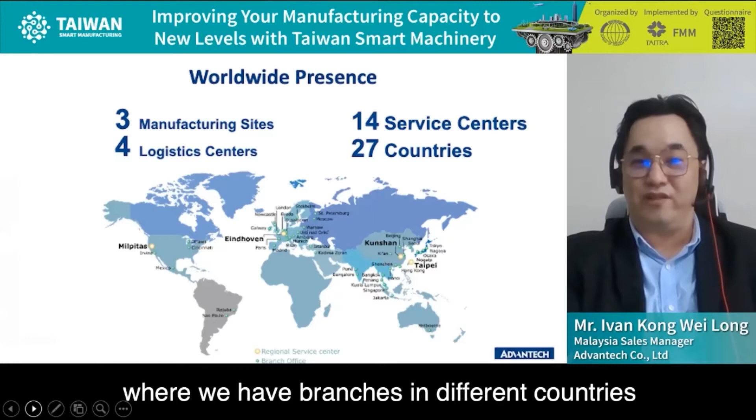This slide shows the establishment of Advantech worldwide, where we have branches in different countries to support our customers. There are 3 manufacturing sites: Kunshan, China, Linkou, Taiwan, and Milpitas in the US.

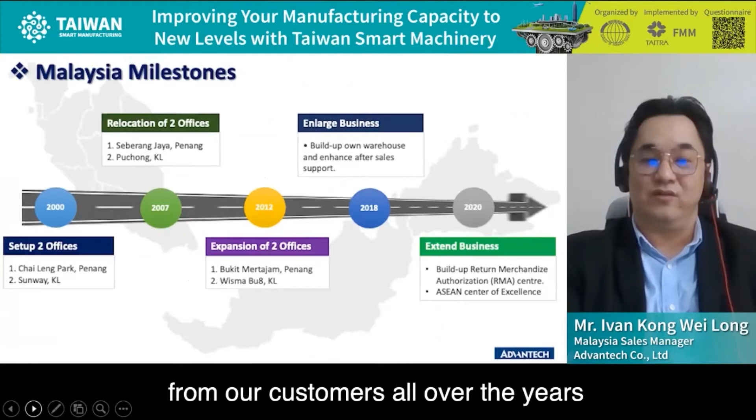For Advantech in Malaysia, this month marked our 21st anniversary of establishment in Malaysia. Thanks to all the support from our customers over the years to Advantech Malaysia. Let me share some recent developments of Advantech Malaysia with all of you.

First is a center of excellence, where Malaysia is a key bridge to ASEAN on new technology developed in Taiwan HQ. This team will be focusing on business development in ASEAN countries and helping with product transfer and also ASEAN ecosystem partner solutions to go wide and far.

Second, we also established a new repair center, or RMA center, in Malaysia to support the whole ASEAN region. This is the location of both our offices in Malaysia, one in Penang, another in Bandar Utama area.

Industry 4.0 is transforming manufacturing worldwide. There are steps crucial to be taken to achieve such a vision. I'll call it steps to success of this vision. It all starts with data acquisition or data collection, then computing and visualization, followed by central management of decision making by respective personnel in the production.

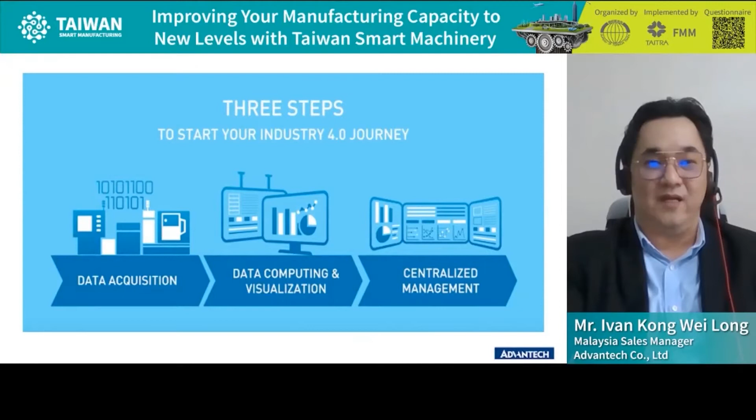When it comes to products and solutions, especially for smart manufacturing, we have produced various products to support this vision. We have lines of products and solutions to assist factories which need assistance as they upgrade existing facilities and establish new ones to take advantage of Industry 4.0 optimization.

From the bottom of the slide, you can see in the diagram where we need to have data collection from the machine and production itself. We have various modules which can support collecting the data from machinery.

The data will then be sent to edge intelligent solution to facilitate the machine connection without replacing existing equipment, allowing collection of equipment status data and production data. On the top layer, if you can see, is what we call WISE-PaaS.

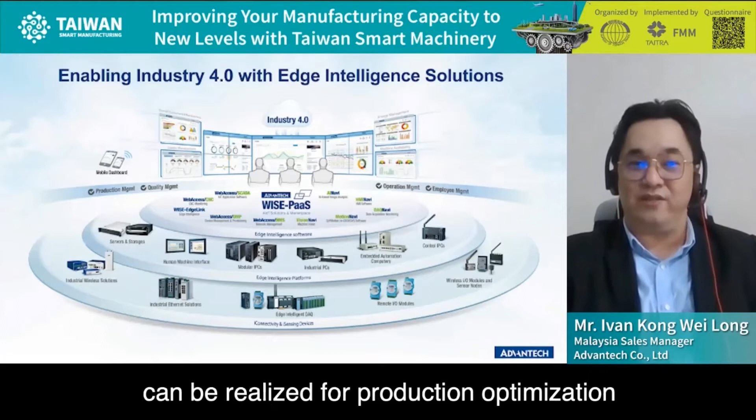It's our software portion, where production monitoring, data integration with MES, and visualization on the situation room dashboard can be realized for production optimization and data-driven decision making.

As last year, we have been promoting and going to market with our OEE solution and optimization solution. Today, I would like to share a new solution from Advantech, focusing on predictive maintenance.

Even though collection of data from the production floor and machinery itself is important, we don't want to miss out on the other crucial thing, the need for facilities and production floor information itself. Let me share today on predictive fault diagnostics, especially for motors and pumps.

What I'm showing is an architecture of data collection from motors, all the way to analysis via AI. Using LoRaWAN technology, which is wireless-based, we will lessen the need to re-layout the infrastructure.

Laying cable is not cheap nowadays, and restructuring a ready infrastructure is tedious. As we are walking into a smarter world, we opt for new technology that can achieve better efficiency and decision making.

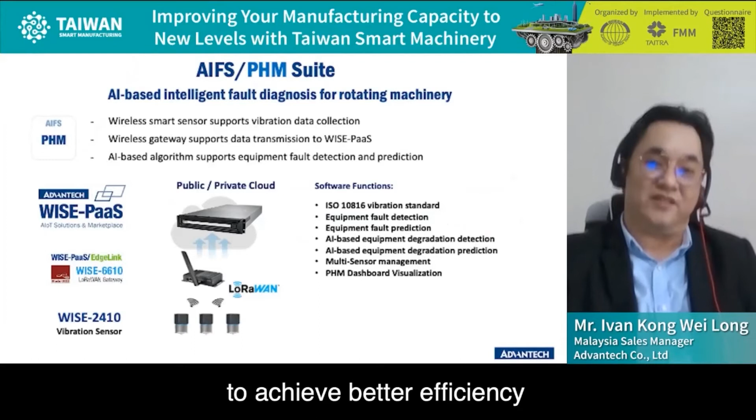In the production floor itself, we comfortably see a transmission distance of 1 km, taking into consideration other building structures and EMI itself. So what do we do after we have the data received?

AI will come into play. Using PHM AI inference, we can diagnose and predict equipment anomalies.

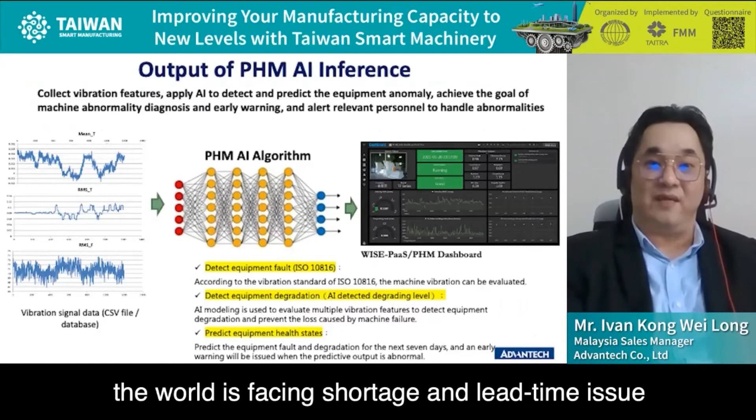As the current world faces shortage and lead time issues, predetermined or forefront early warning is very important. As engineers, we can estimate the degradation rate and also pre-plan ordering using the data from AI. Every decision is based on data, making it more accurate with better communication between teams in the organization.

I call it a data economy. With data, it helps the end customer manage inventory and also know the best time to purchase.

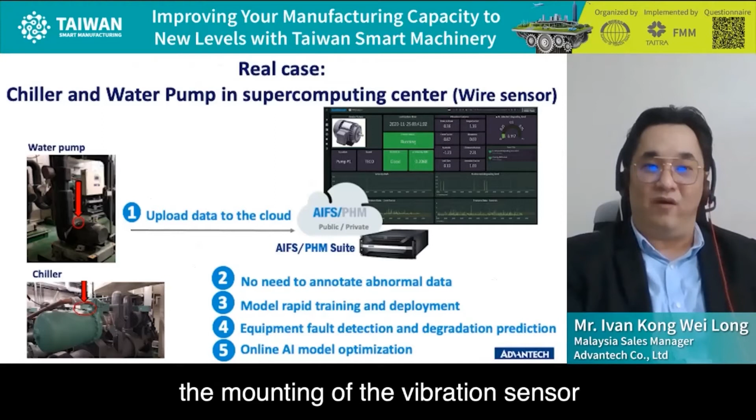Let me touch on one of our successful stories, an implementation in a chiller and water pump for a data center. First, the mounting of the vibration sensor is simple - by a magnet-based metal mounting to attach it to the motor itself. It's wireless and runs on battery.

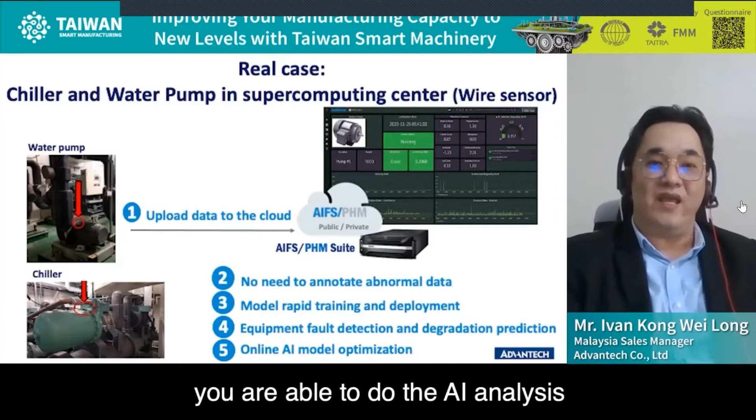We grab the data and send it all to the cloud or an on-premises server. Via the software, you are able to do AI analysis and visualization for the customer to make a better decision. This requires the AIFS PHM suite itself.

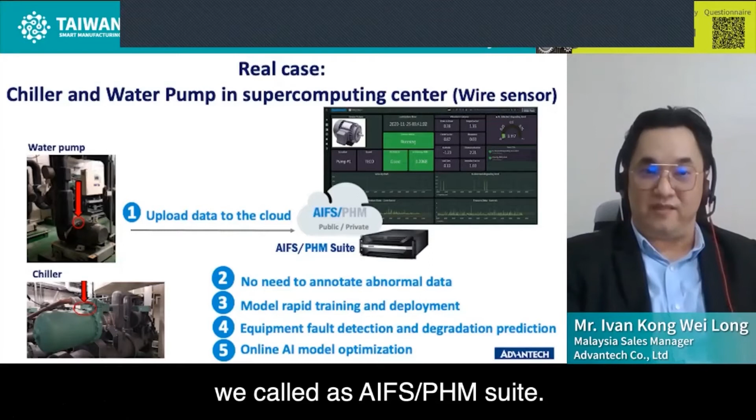Let's have a look at the reporting of the AIFS PHM visualization portion. It provides information on equipment fault via ISO 10816, equipment degrading levels, and prediction of equipment health status. This template is customizable to your preference.

Only what you can't change is the background running of the AI algorithm. The way of reporting, alarm notification, formatting, and add-ons are customizable.

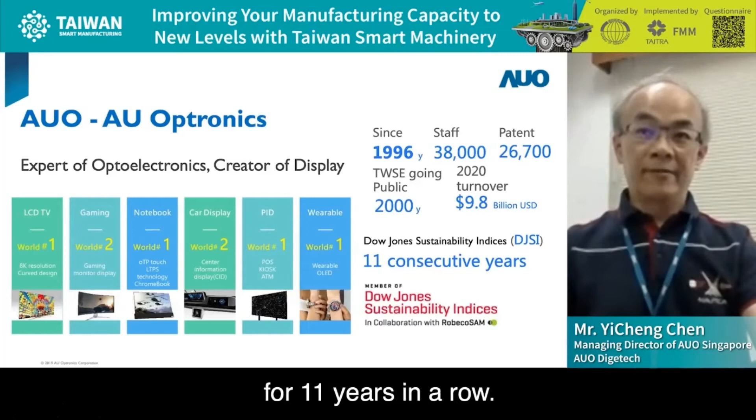Who is AUO? We are not only an expert of optoelectronics with leading technology in the LCD industry, but also an AIoT solution initiator and provider. AUO was established since 1996. Total employees are over 38,000, and we've been tabulated on the Dow Jones Sustainability Index for 11 years in a row.

Every year, we deliver over 240 million panels, sizes ranging from 0.8 to 86 inches, and over 1,000 product models to our worldwide customers. Our major production process includes the front-end and cell process, as well as back-end module fabrication. It is a complicated but delicate manufacturing process.

What's the benefit we get from smart manufacturing? Here is our story, what we can make up from AI and smart manufacturing. So far, we initiated over 100 AI projects every year and cultivated over 300 AI experts with different backgrounds and manufacturing domain knowledge. Total AI trainees are as many as 6,000. As for the achievement of our continuous improvement with AI, our efficiency and productivity is up 30% during the past 4 years. It's a remarkable number, and our related activities are continuously rolling on.

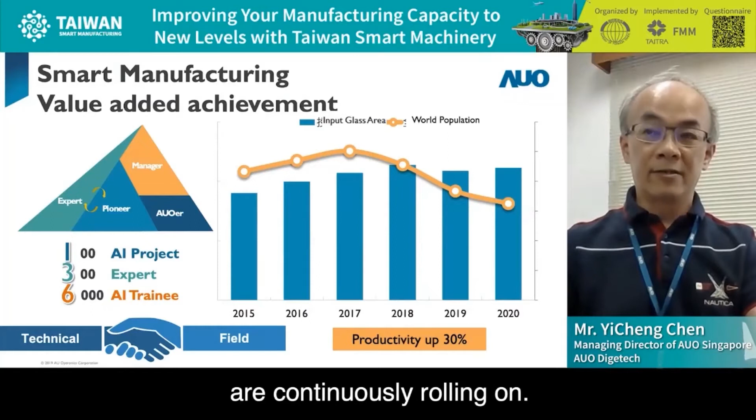AUO Digitech, we are a company wholly subsidized by AUO, leveraging our strengths and experience from our mother company. We are positioning ourselves as a leading AIoT solution provider. Till now, worldwide, we have manufacturing sites and service available: the first, Suzhou and Xiamen in China; the second, in Taiwan; and the third, your close neighbor, Singapore. From Singapore, we can provide different field and domain AIoT service and support you nearby.

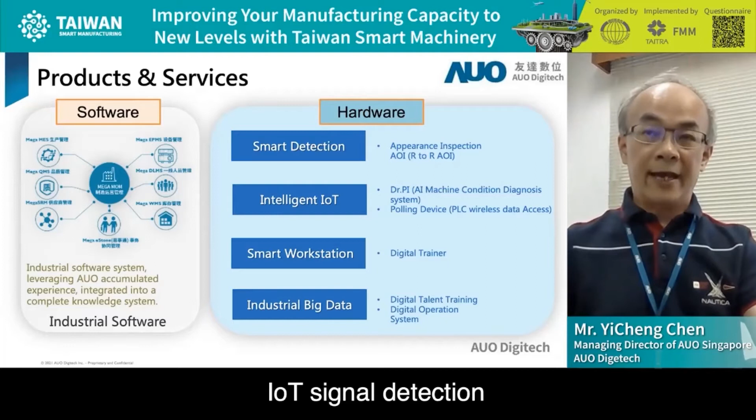With abundant practice and experience accumulated from our mother company, AUO Digitech provides software services like MES, WMS, and EPMS, and hardware AIoT agile and handy products like smart detection, IoT signal detection, digital trainer kits, and industrial data collection and control systems. So far, more than 200 customers from different segments and field applications have awarded AI projects to us, and we play a role of win-win and reliable partnership with each of our valuable customers.

We believe in the future, a flexible but edge ecosystem would be the champion of the new norm of competition. We have devoted ourselves to smart manufacturing and accumulated a lot of valuable experience with our vision of 3C. What is 3C? The first, cooperation; the second, co-creation; and the third, complementary. We believe AUO Digitech would be your best partner for domain-focused solution integration and provision.

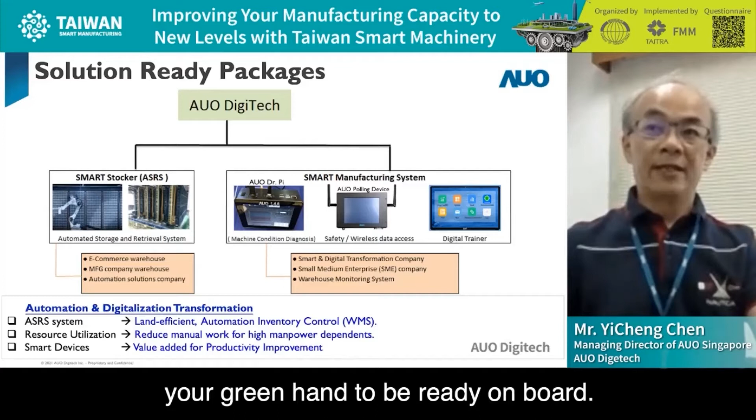ADT Singapore's ready package for your AIoT solution includes ASRS, automated storage and retrieval system, widely used in warehouses for e-commerce, electronics, pharmacy, semiconductor fab, and commodity distribution. As for smart manufacturing jigs, there's Dr. Pi for machine health diagnosis, polling device for safe and wireless machine data retrieving, and digital training jigs to speed up your green hand to being ready on board. With our solution, we can fulfill your need for automation and digitalization transformation. Our ASRS system provides efficient and cost-effective inventory control.

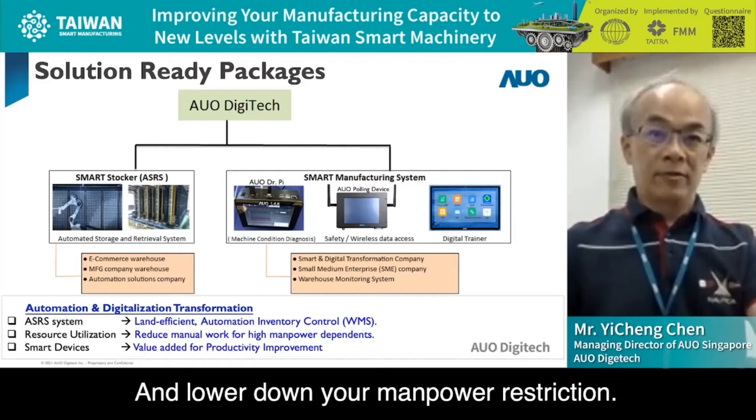And lower down your manpower restriction. Also help you to pursue a value-added production pipeline.

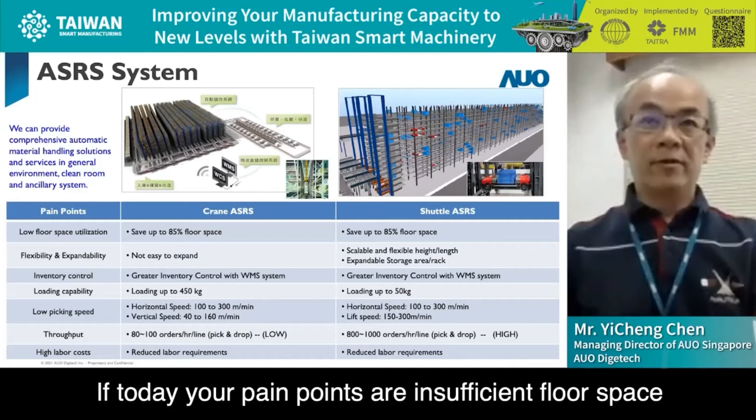What our ASRS can do for you. If today your pain points are insufficient floor space, want more flexibility or expansion capability to have better inventory control, or suffering high labor costs, our ASRS solution can be your best panel for a quick fix.

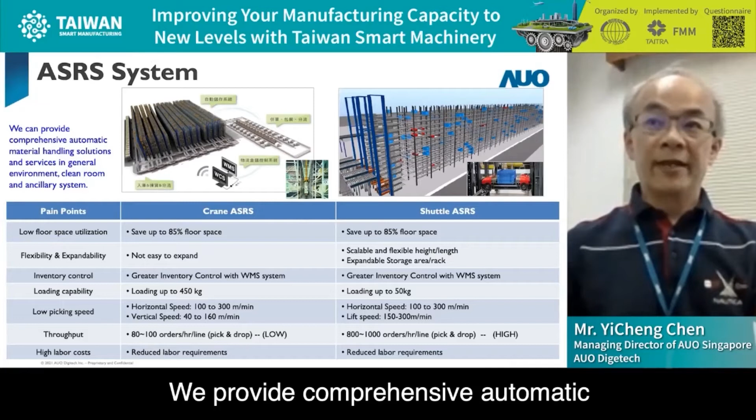We provide comprehensive automated goods handling solution and service in clean room or general shop floor. Both crane and shuttle solutions are available now, depending on your goods loading or throughput limitation.

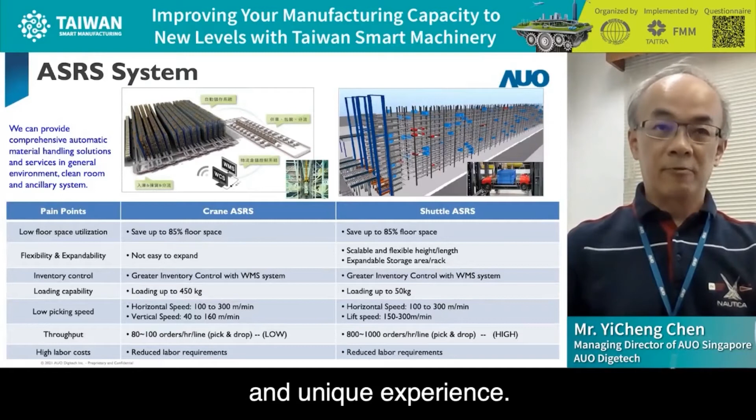As for our smart manufacturing, the first product available to you is our training assistant. It can solve your pain point of high turnover rate of labor force or high training costs.

The installation is a very simple step. Here are 5 steps: first, role setting; second, preparing and uploading your class training material; third, follow our instructions for learning, including training class or quiz; fourth, evaluation of course effectiveness; fifth, vision-based training management.

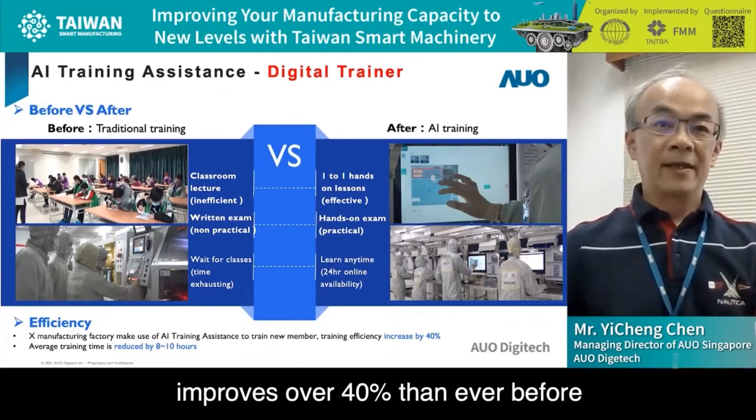Here is our real example we can further share with you. Actually, in our China Xiamen site, with AI training assistance, the training efficiency improved over 40% than ever before, and the average training time shortened by 8 to 10 hours. With these toolkits, we can enhance and repeat our class training regularly and anytime if you need.

The next one, our AI polling device. If your machine is under PLC control, our AI polling device can do something good for you. It can extract and upload your PLC data via Wi-Fi or assign by server or cloud.

Our AI polling device provides plug and play and doesn't need high-cost machine modification. With this powerful signal and data polling jig, you can reduce your machine downtime and improve machine efficiency with productivity easily.

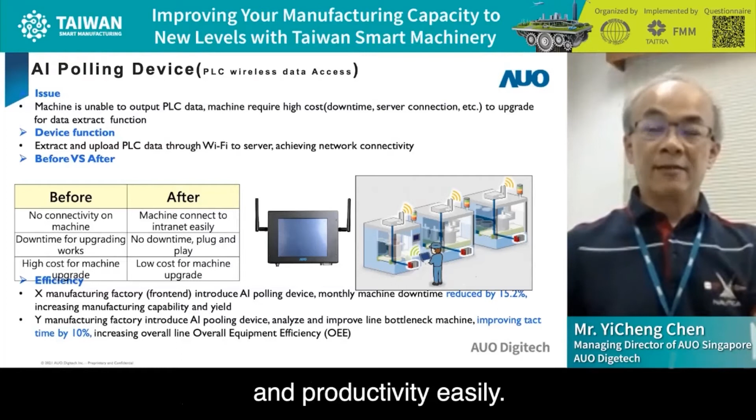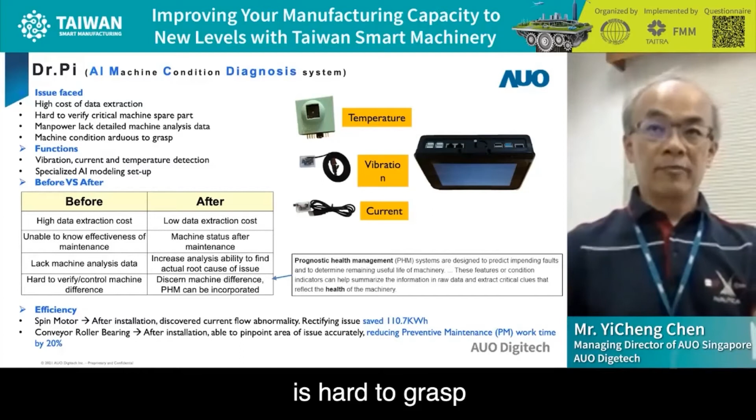And the next one, our Dr. Pi. What's the Dr. Pi? If you or your team are suffering high cost of data extraction, finding it very hard to verify the critical machine spare parts, or lacking enough and useful machine data, or struggling to grasp machine condition, our Dr. Pi can be your answer.

It can be easily adapted with vibration, current, or temperature detection, and integrate with our AI algorithm. With this handy and smart tool, you can solve your power bill issues or optimize the preventive maintenance to improve your production loss. Thank you for your attention and your precious time.

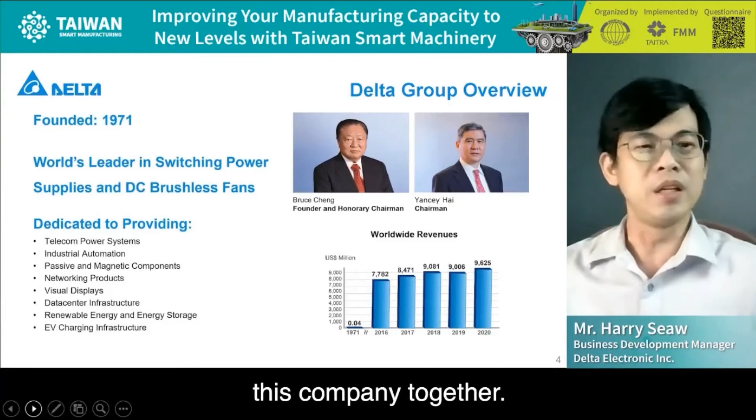Delta Electronics was founded in 1971 by our founder Mr. Bruce Cheng, and currently our chairman Mr. Yancey Hai is also running this company together. Delta's products and services cover telecom power systems, industrial automation, passive and magnetic components, networking products, visual displays, data center infrastructure, renewable energy and energy storage, and EV charging infrastructure.

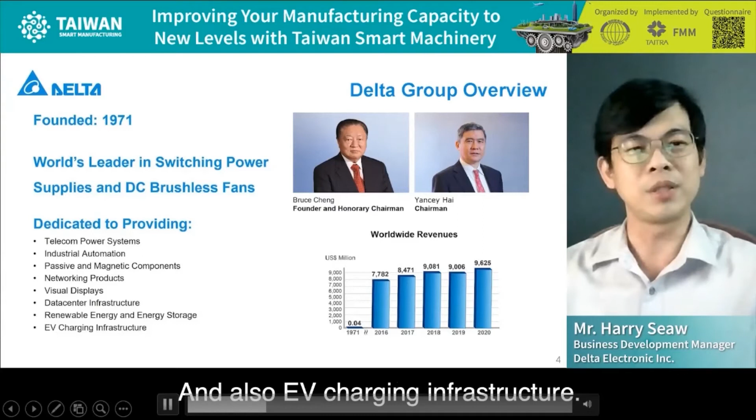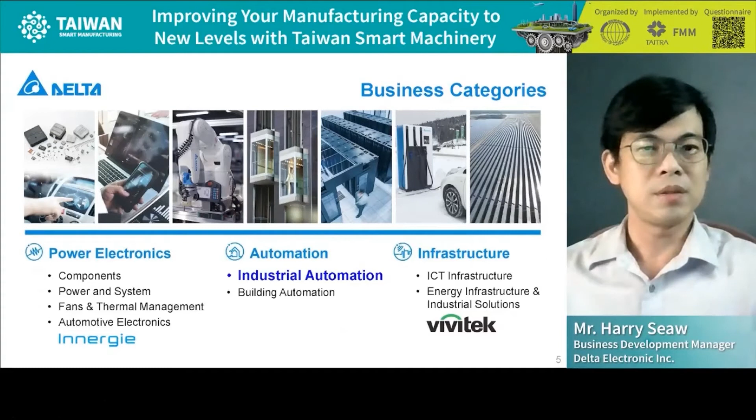Our business mainly covers three major areas: power electronics, industrial automation, and infrastructure. Next, I'm going to introduce Delta's manufacturing solutions.

The first one is an energy-saving air compressor solution. We have standardized and customized solutions specifically for air compressor systems, consisting of our PLC, inverters, power meters, and other inverter components. The benefit of this solution is it integrates with equipment IoT and automation for air compressors, with digitalization and data visualization via IoT and cloud.

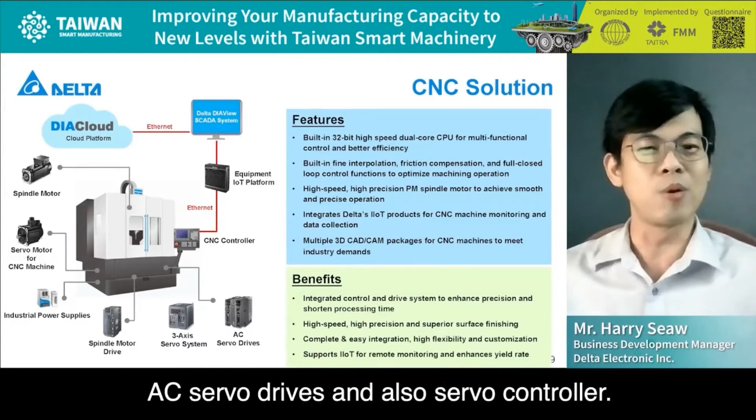Next, we introduce our CNC solution. It features a built-in 32-bit high-speed dual-core CPU for multifunctional control and better efficiency, and provides a high-speed, high-precision PM spindle motor to achieve smooth and precision operation. Our Delta CNC solution consists of an IoT equipment platform, standard CNC controller, AC servo drive, and servo controller. The benefit of this solution is it provides high speed, high precision, and superior surface finishing, and can also link directly to the cloud.

Next is the motion control solution. Delta provides a standard type of motion control solution which enables different types of manufacturers to integrate with different types of control systems. This provides an open field bus structure for flexible communication control, and is a total solution integrating hardware and software to enhance production efficiency.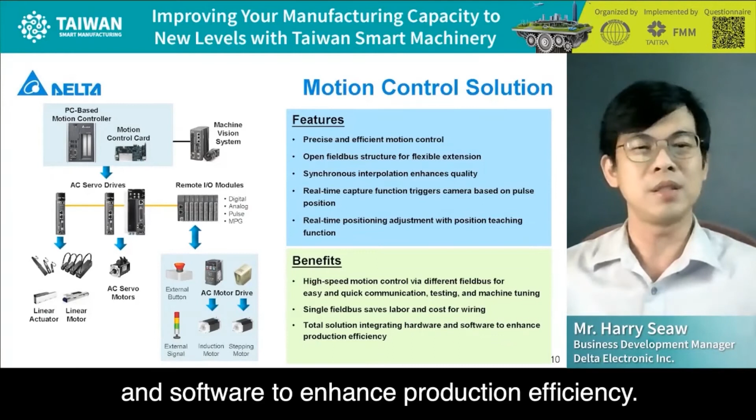Next is the packaging machine solution. This is one of the most popular packaging machine solutions and is widely used in Malaysia in the F&B industry. We provide PLC, HMI, AC servo motor, temperature controller, and AC servo drive. The benefit of this solution is it enhances machine performance to achieve high-speed packaging and excellent production efficiency, and can link with downstream packaging and upstream filling.

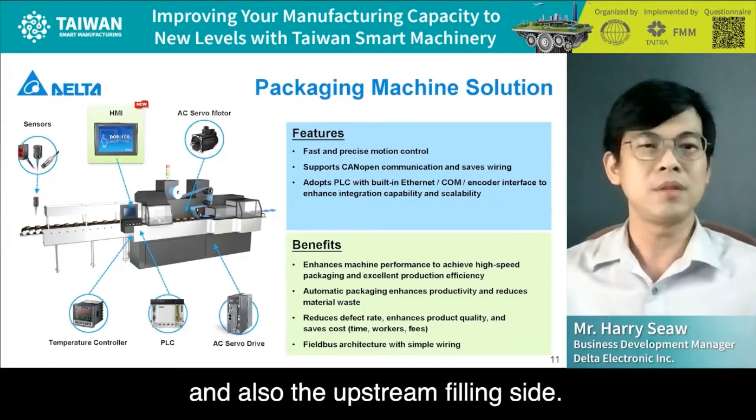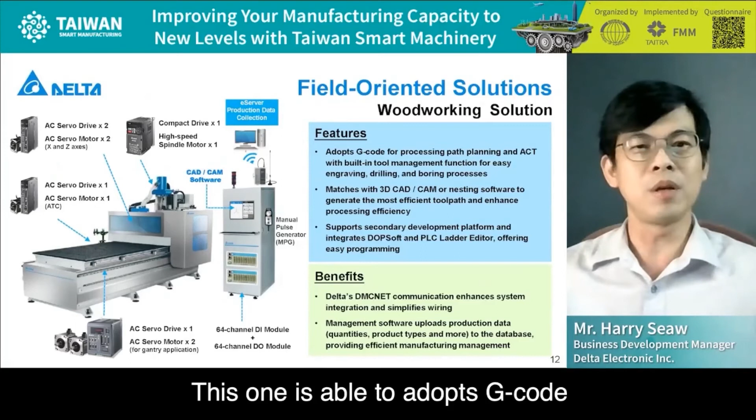Next is our woodworking solution, which is used in the furniture industry in Malaysia. We provide standard servo drive, inverters, and PLC controller. This is able to adopt G-code for processing path planning and built-in management function for easy engraving and boring processes.

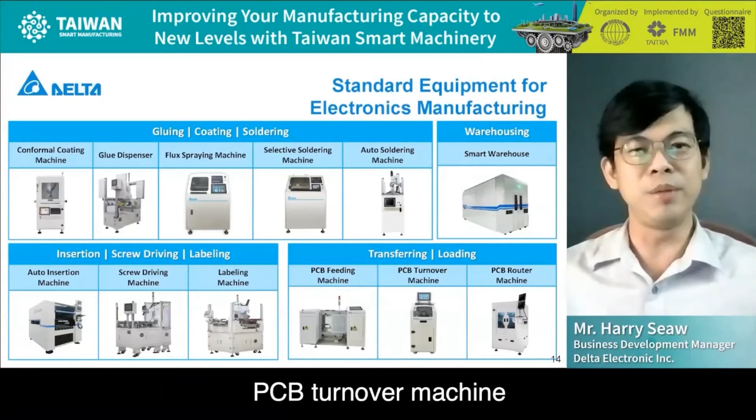Last, I'll introduce our standard equipment for the electronics industry. Delta Electronics has a business unit we call AMBU, which provides standard equipment. As you can see in this picture, these are standard machines built for the electronics manufacturing industry, including coating machines, glue dispensers, flux spraying machines, and soldering machines. We also have a warehouse machine solution for smart warehouses, plus auto insertion machines, screw driving machines, labeling machines, PCB feeding machines, PCB turnover machines, and router machines.

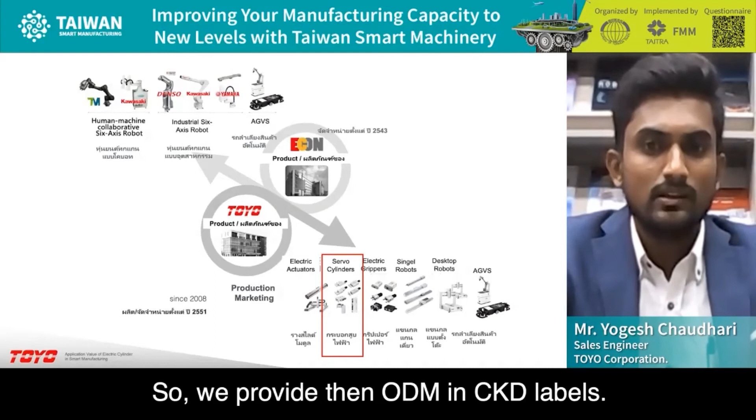In 2014, CKD, a major manufacturer in the Japan market, found Toyo and wanted an electric products evaluation. It asked us for ODM, so we provided them ODM with the CKD label. Besides that, in 2019, Yamaha also asked us for the manufacturing of ODM products. So we are the only Taiwan manufacturer providing the Japanese market electric cylinder manufacturing in Taiwan with a Japanese label.

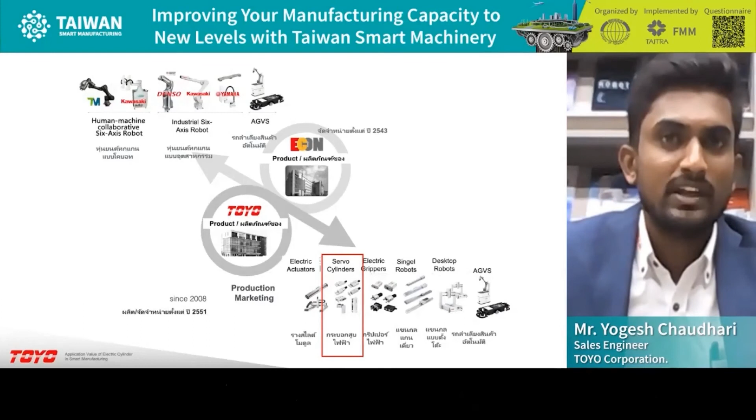Let's talk about these other products also. You can see here in the beginning we also provide Yamaha, Kawasaki, Denso, and TM robots. Besides that, we have electric actuators, servo cylinders, electric grippers, single axis linear motors, desktop robots, and AGVs. So today we are going to talk about the servo cylinder.

Let's have a look at the relationship between market size and price of electric cylinder. I think everyone is also very clear that maybe hybrid cars or EV cars were not sold so well in the beginning. So let's talk about our products also.

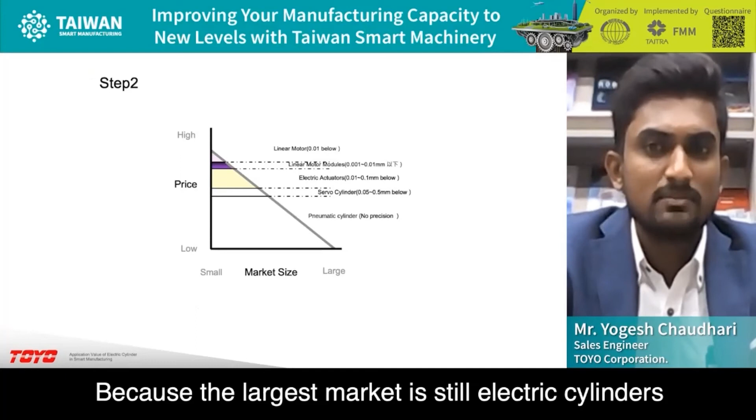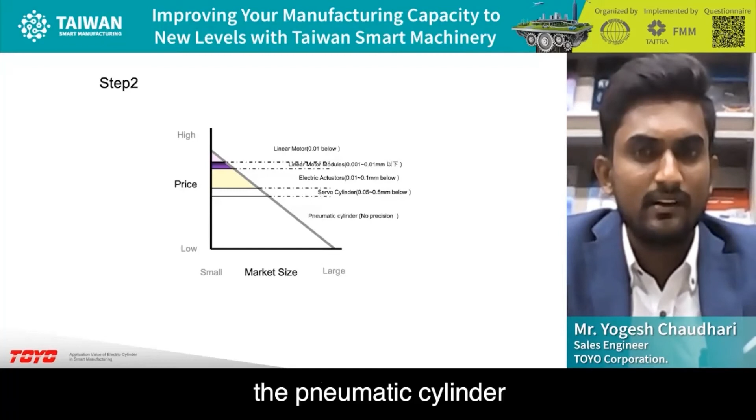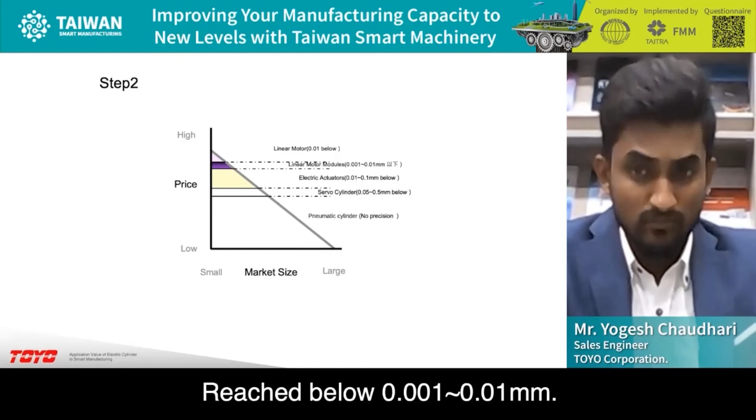In response to market demands, the ball screw driven Toyo actuator can reach 0.5mm to 0.05mm, and with Toyo's product it can be used on the linear motor, reaching below 0.001 to 0.01mm. We believe that such product can meet the needs of the market and improve the quality of customers' manufacturing.

So let's talk about the difference between pneumatic cylinder and electric cylinder. For the pneumatic cylinder, we need these components: compressor, air filter, magnetic valve, speed regulating valve, sensor, and PLC, many things.

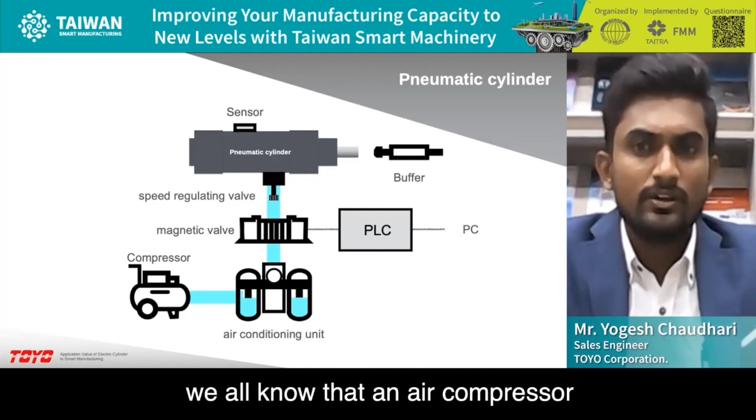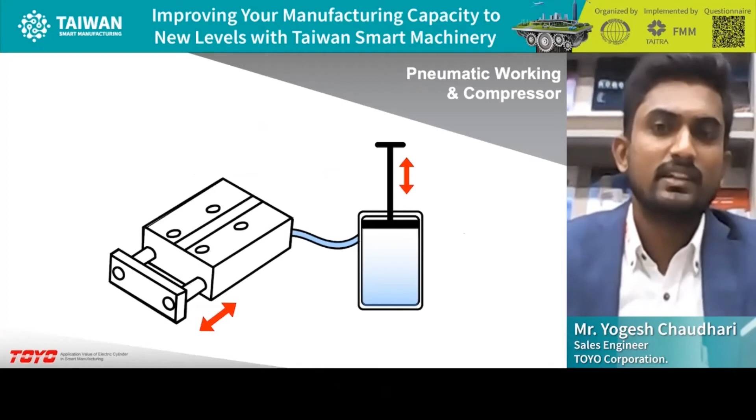Compared with the electric cylinder, the traditional pneumatic cylinder needs the air compressor connected to the solenoid valve, switching through the 3-point combination of lubrication and filtration. It takes 15 to 20 minutes to adjust the air pressure to avoid air pressure surge.

Sensors and buffers should also be equipped around the machine, and so on. The surroundings are quite complicated, unified through the upper control.

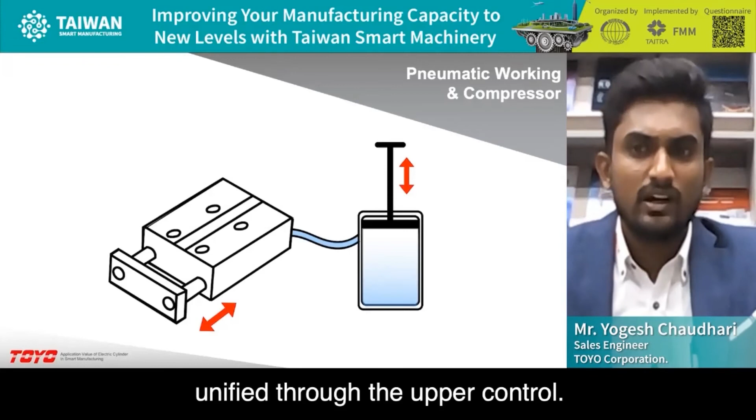Another disadvantage of air pressure is that when the pneumatic cylinder is new, it will operate very smoothly. But after 1 to 2 years, problems will occur.

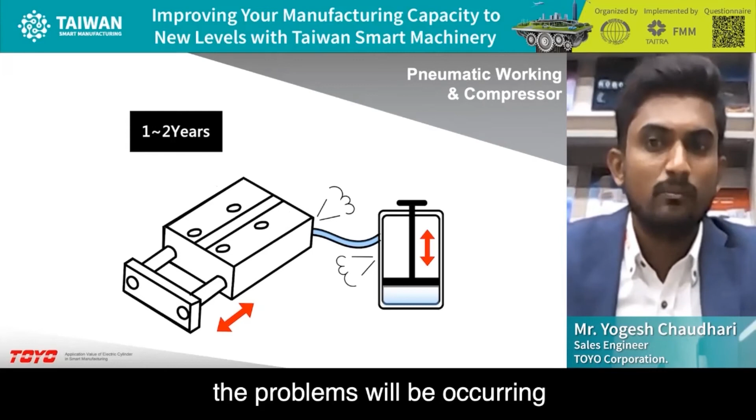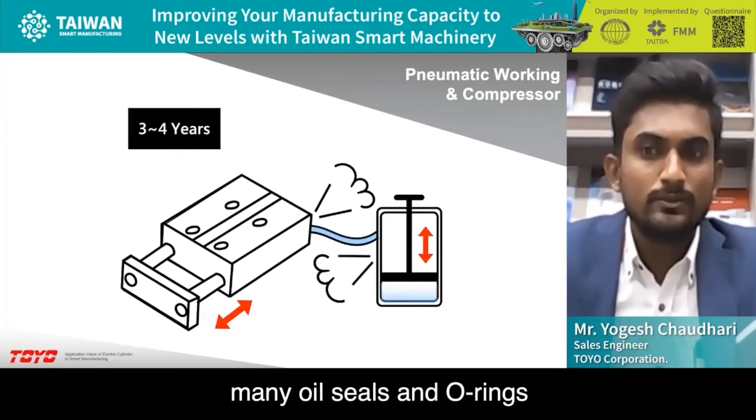Maybe pipeline leakage or air leakage, and after 3 to 4 years, oil seals or O-rings will begin to deteriorate and the life of the air pipe will end. At this time, maintenance and replacement of products are required.

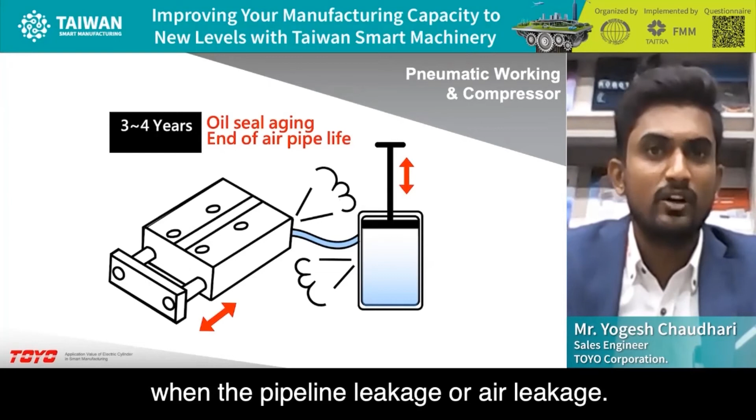The electric cylinder is different. In fact, it has a steel body inside. It can be driven by the belt or screw. This is equipped with the motor at the back, and the motor is directly connected to the controller.

Like our computer, you will drive it through the host. Of course, the host is also another computer. If you only need to do signal control, you can directly omit the PC or the PLC.

This part saves a lot, no matter the space, control surface, or design surface. This part can achieve real savings for the customers.

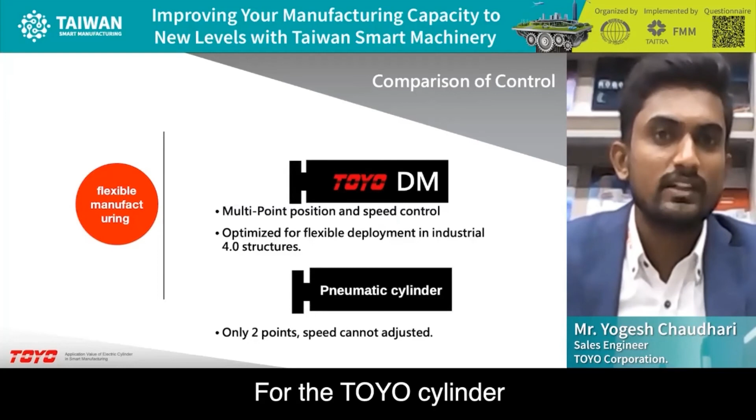Here you can see, for Toyo's electric cylinder and the pneumatic cylinder, the comparison of control. For the Toyo cylinder, you can also set multi-positioning, like in our DM series, you can set 127 points. But for the pneumatic cylinder, you only can set 2 points.

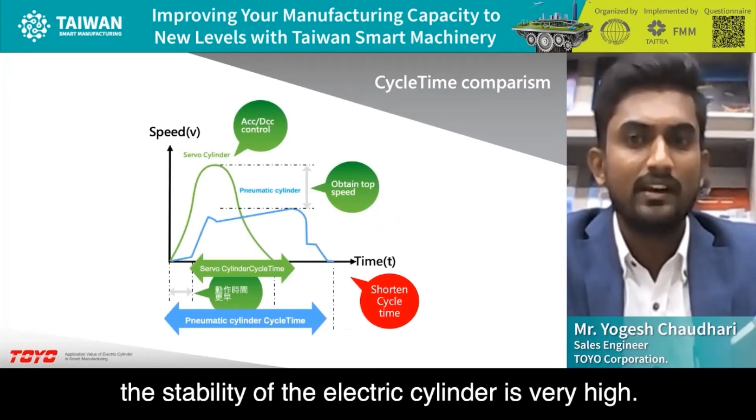Compared with cycle time, the stability of the electric cylinder is very high. In terms of cycle time, basically it can be effectively shortened, improving production efficiency and reducing production cost.

Here you can see acceleration and deceleration for the electric cylinder, the cycle time is shortened. But for the pneumatic cylinder, you can see the acceleration and deceleration. So the electric cylinder can save your time.

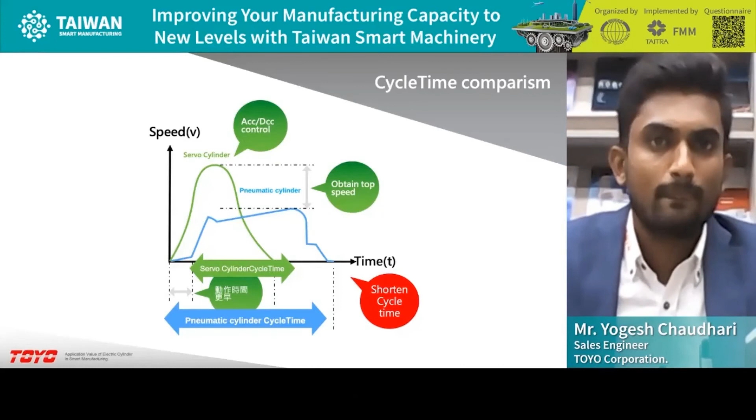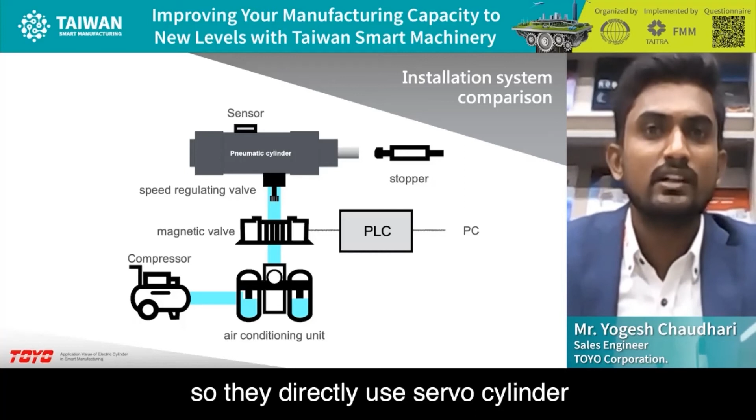The advantages of the electric cylinder: basically manufacturers making lenses need high accuracy, so they directly use the servo cylinder. You can see, because they don't need to operate the compressor, a valve and solenoid valve, they can directly be driven by the driver because they have one motor here besides that.

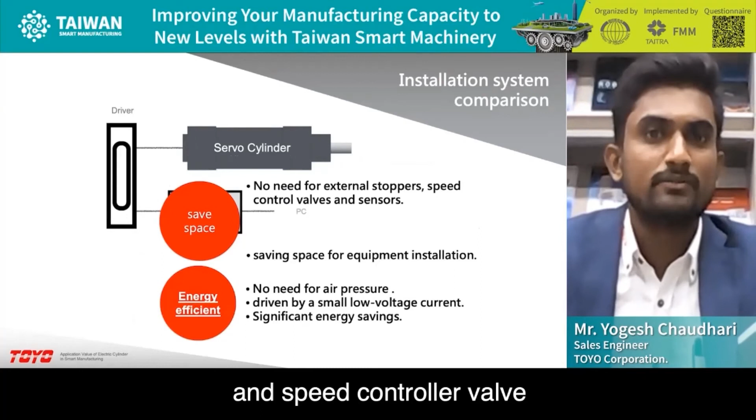Another advantage is no need for external stopper and control valve, as we talked about, saving space for the equipment installation.

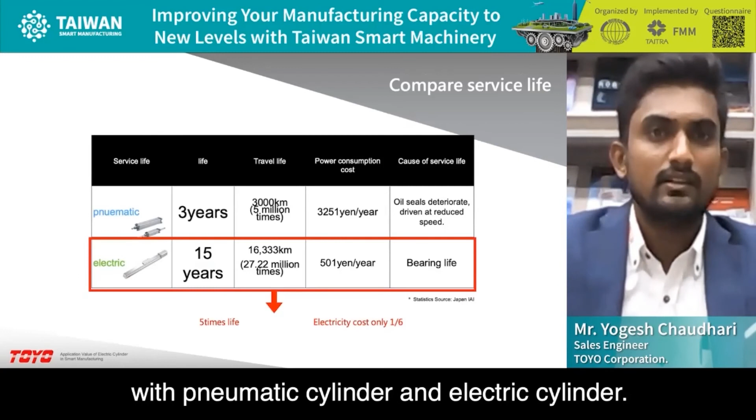For the long term, you can see the comparison of pneumatic cylinder and electric cylinder. Over 3 years, the pneumatic cylinder can run only 3,000 kilometers, that means 5 million times. But the electric cylinder can run for 15 years.

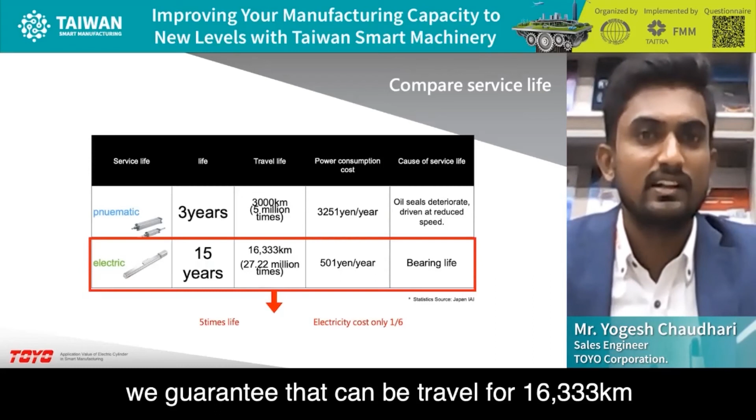We guarantee it can travel 16,333 kilometers, that means 27.22 million times. For the comparison of life, this data is from Japan. Basically, the electric cylinder can be 5 times longer than pneumatic cylinder, but the electricity cost is reduced to 1/6. You can see it will save your electricity also.

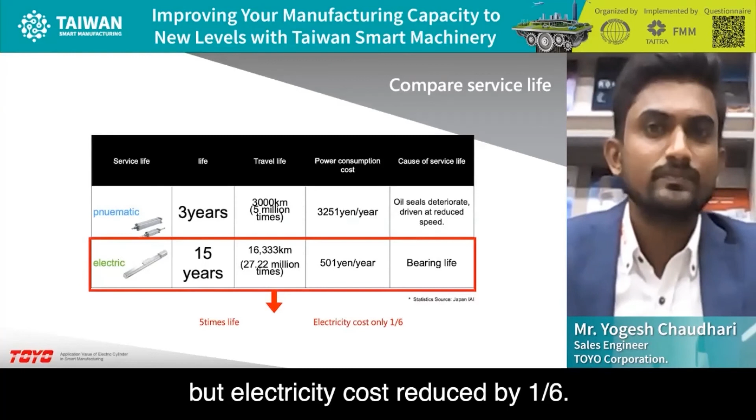Considering the long-term comparison, in the beginning you may think the electric cylinder must be expensive, but for the long term, over 5 years, the cost will be reduced.

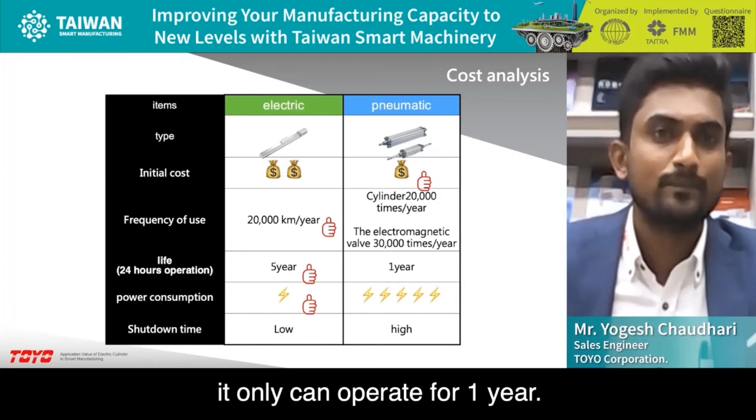If you operate for 24 hours, we guarantee our products can operate for 5 years. But for the pneumatic cylinder, it only can operate for 1 year. And of course, for shutdown time, the electric cylinder is low and pneumatic is high.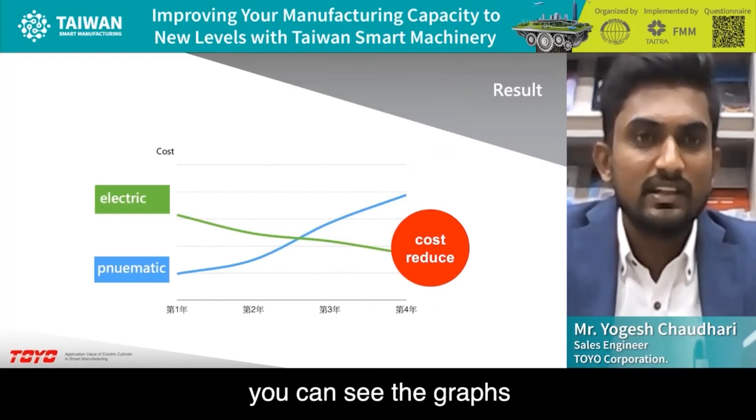For the last 4 years, you can see here the graph. Electric actuator reduces your cost, but for the pneumatic actuator, it will increase your cost in the future. Here is the difference between the electric cylinder and servo cylinder.

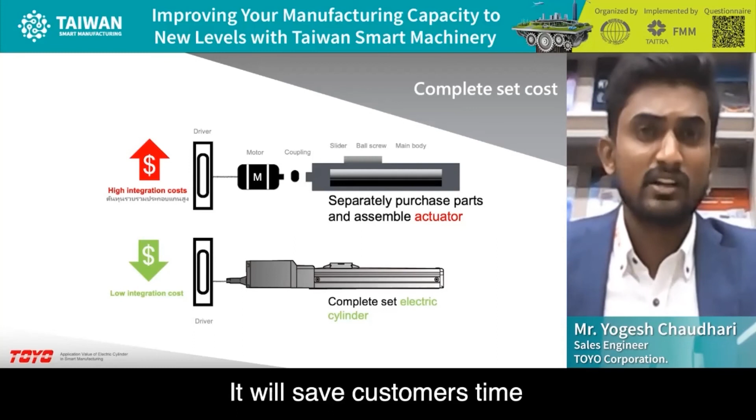Many customers are using electric actuators, but what they do is assemble by themselves. The motor they purchase separately, controller purchase separately, coupling and other equipment purchase separately, and assemble by themselves. But here in Toyo, we provide design from the beginning, design with the module, with the control, with the total solution. This saves customers time designing their own product. We already have these standard products, and we have low cost with the fastest lead time.

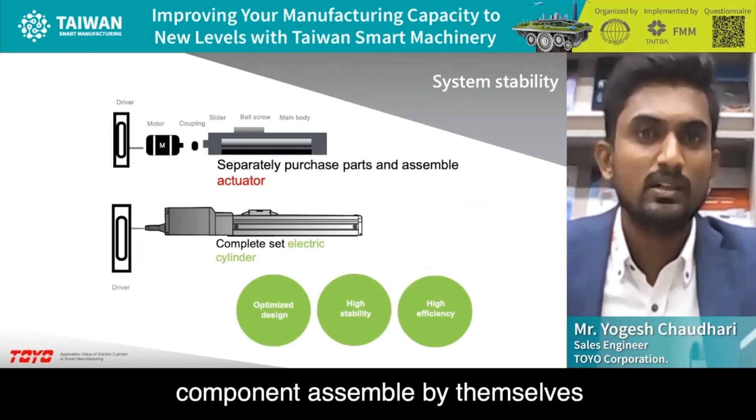As you can see, customers separately purchase the components and assemble them themselves. But we have a complete set, so you can directly order the complete set from us. We have 2 controllers: one is TC100, another is XC100. It can run for pulse control, IO control, and communication control. For other brands, if you want to use a controller with pulse control, you cannot change to IO control, or maybe you cannot change to communication control. But in our controller, we have 3-in-1: pulse control, IO control, and communication control.

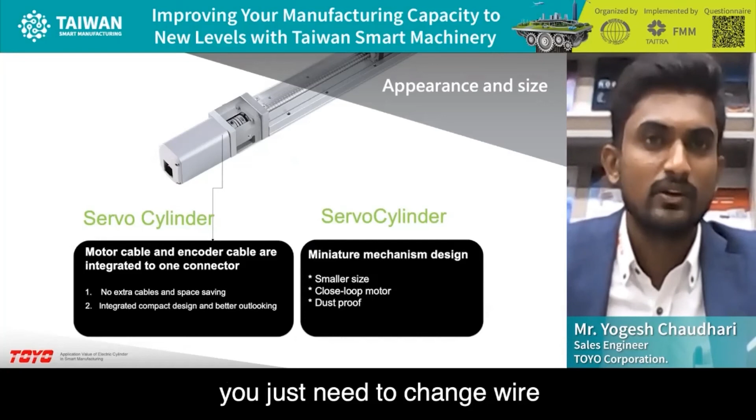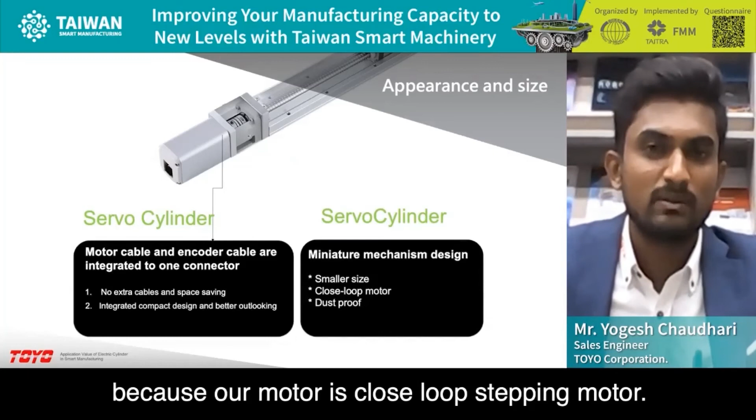You can see here we have one motor cable. The encoder cable and motor cable only use one connector, and they can be separated. So if in the future the wire has a problem, you can save the motor set and directly replace the wire here. Also, you don't need to add any extra sensors because our motor is a closed loop motor, closed loop stepping motor. Also you can see here it's dust proof, and it's the smallest size of actuators.

We have different kinds of actuators in this series, from CGTH3 to CGTH8. After that, we have the servo cylinder miniature, which we call the DM series in our products. It's combined with electric controlling and only needs to be installed with mechanism input unit command.

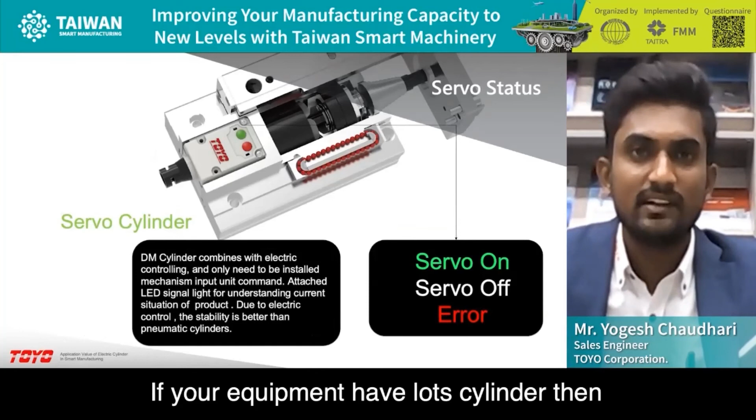There is one LED light attached here. If in your equipment there are lots of miniature cylinders and a problem occurs, you can easily find the error here. This LED can show you the error in your UI. This is our UI, I won't go into the details here.

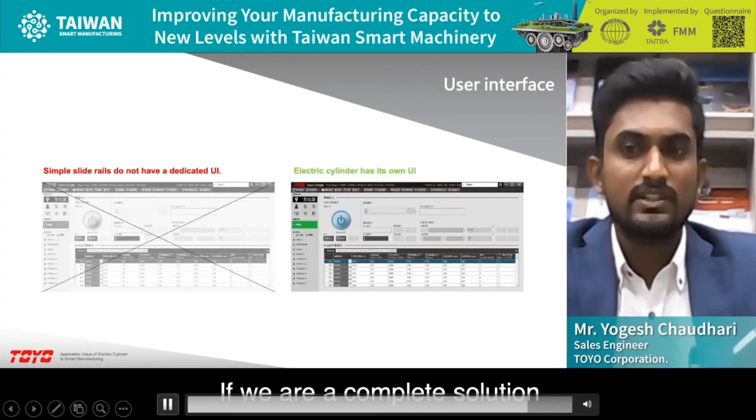Basically, we started as a distributor in the beginning, and we also specialize in a lot of technology. We will make designs according to customers' requirements. For the electric cylinder, we can do external monitoring action. As a complete solution, we have Chinese language, English language, and also Japanese language in our UI. We also provide training for customers to learn our UI.

In Toyo, for servo cylinders, we have this kind of total solution. You can see here the CGTS series, CGTY series, CSG miniature cylinders, CSS grippers, CSG grippers with closed loop stepping motor and TC100 control.

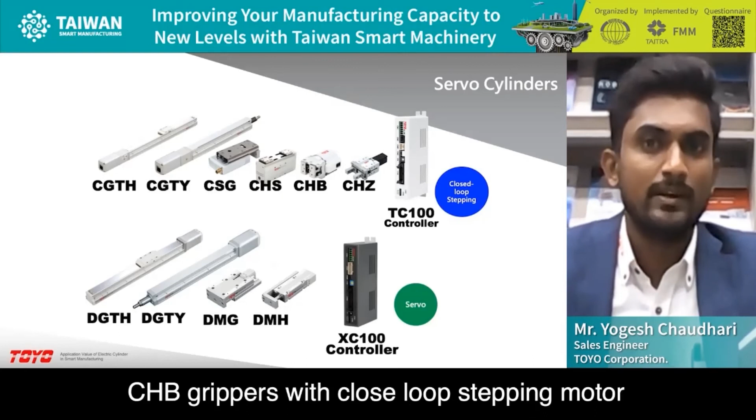We also have servo motors like DC 24 voltage with XC100 controller: DGTH series, DGTY series, DMG series, and DMH series. The main advantage of this servo cylinder is that the motor can run at 3600 RPM, so it has high speed and high accuracy.

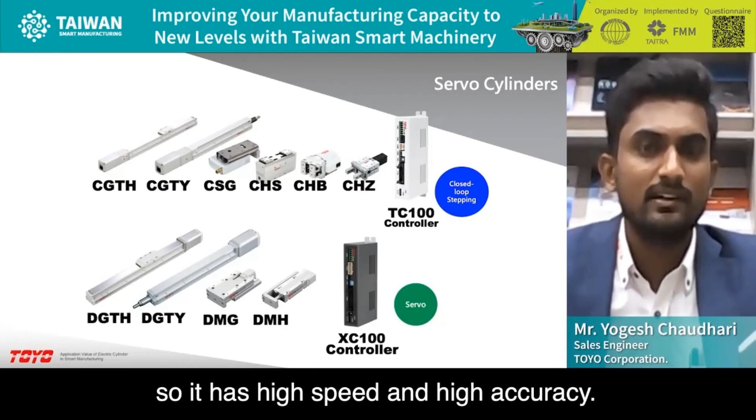So these things we provide to the customers. For the design, you don't need to spend your time designing because we already have these standard products here in our company, and the lead time for us is only 2 weeks. It will be low cost and high stability.

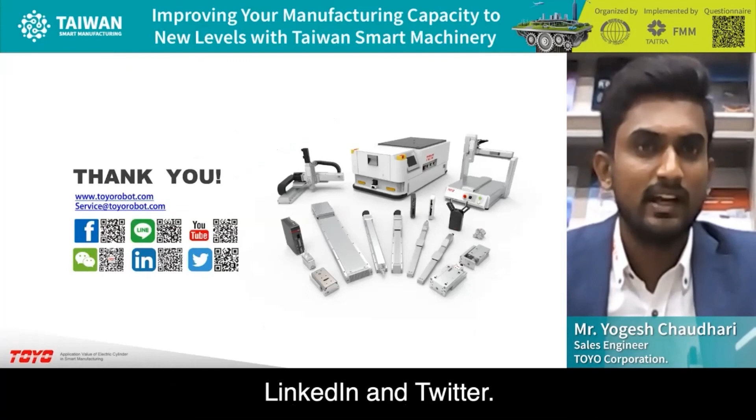Okay, so this is all of our products. If you need any information, you can also find our website here. We have Facebook, Line, YouTube, WeChat, LinkedIn, and Twitter. And here I finish my presentation. Let's talk about it, if you have any questions, please ask.